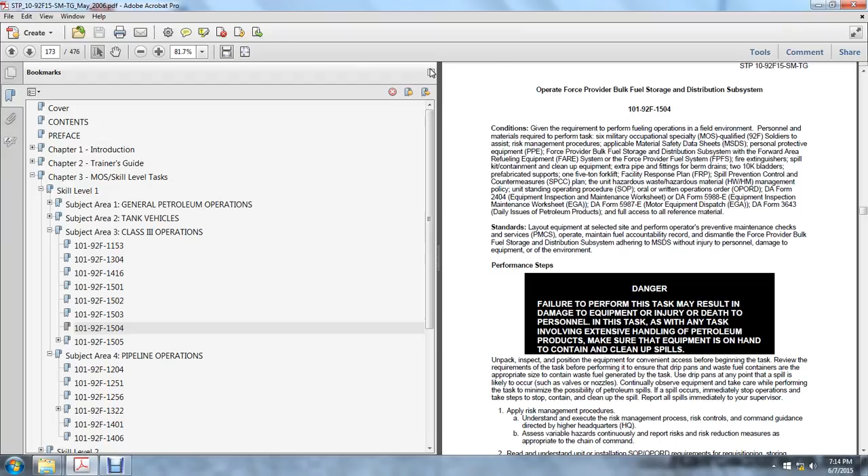Okay guys, I have two sections left, and this should be about a 20-minute read. We're on subject 3, the last part. We're going to finish the last part of the Class 3 operations, starting with 1504, 101-92-F-1504, and then 1505, and then we'll be done for the book.

Operating Force Provider bulk fuel storage distribution system, given the required personnel and materials to perform the fuel operations task. Six military occupational specialists qualified as soldiers, risk management procedures, applicable materials safety data sheets, personal protective equipment. Force Provider bulk fuel storage distribution system, forward area refueling system, Force Provider fuel system fire extinguisher, spill containment cleanup, extra pipe fittings, drains, berm drains, two 10K bladders, prefabricated supports, one five-ton forklift.

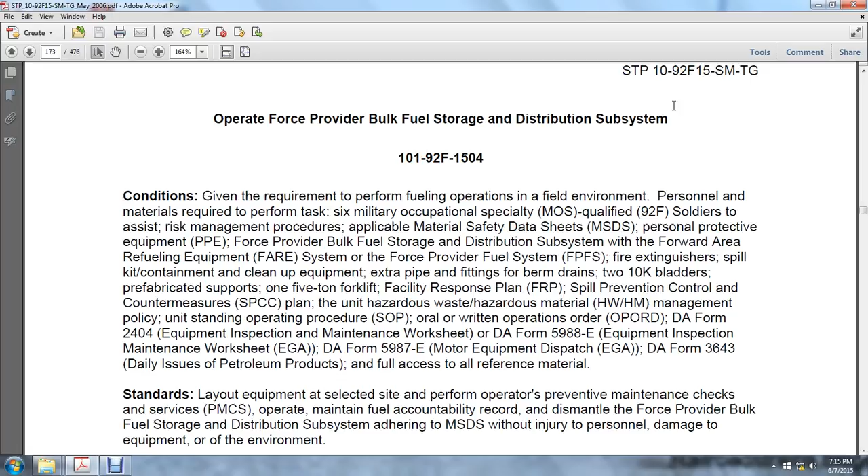A facility response to spill prevention control countermeasure plan, the unit hazardous material management policy, unit standing operating procedure, oral or written operation order, DA Form 2404 equipment inspection worksheet, DA Form 5988E inspection and maintenance worksheet, DA Form 5987E motor equipment dispatch, DA Form 3643 daily issuing of petroleum products, plus access to all reference material.

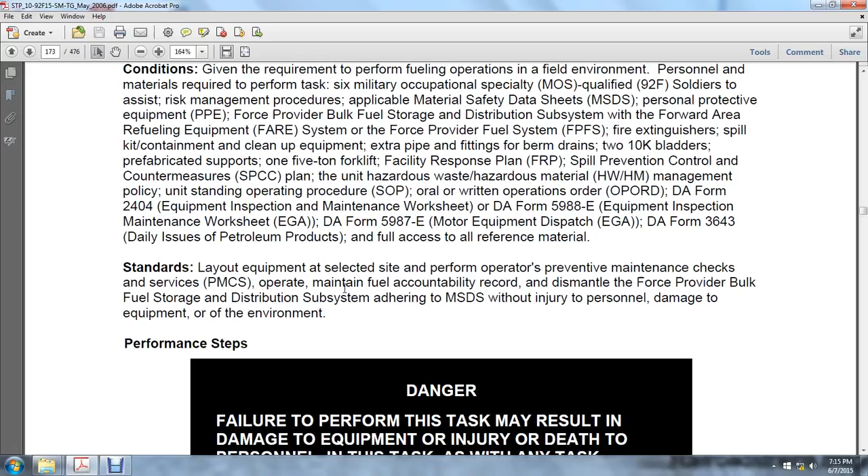Layout and equipment are selected by the site of the performer, operator preventive maintenance check services, operator maintains fuels accountability record, to dismantle the force provider bulk fuel storage distribution system, adhering to material safety data sheets without injury to personnel, damage to equipment, or the environment. Failure to perform this task may result in damage to equipment, injury, or death of personnel.

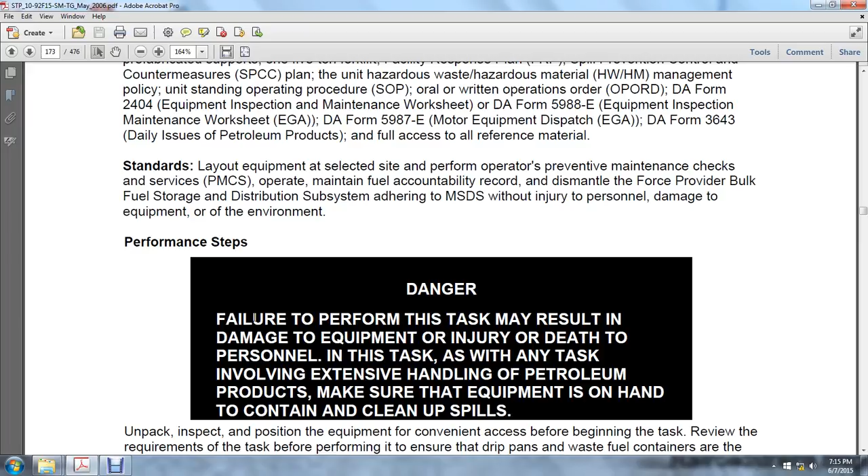As with any task involving extensive handling of petroleum products, make sure equipment is on hand and contained to clean up spills. Unpack and position equipment for convenient access before beginning the task. Review the requirements of the task to ensure drip pans and waste fuel containers are the appropriate size to contain the waste fuels generated by the task.

Use drip pans at any points where a spill is likely to occur, such as a nozzle or a valve. Continually observe the equipment, taking care while performing to minimize the possibility of petroleum spills. If spills occur, immediately stop the operation, take steps to contain it, and clean up the spill. Report all spills immediately to the supervisor.

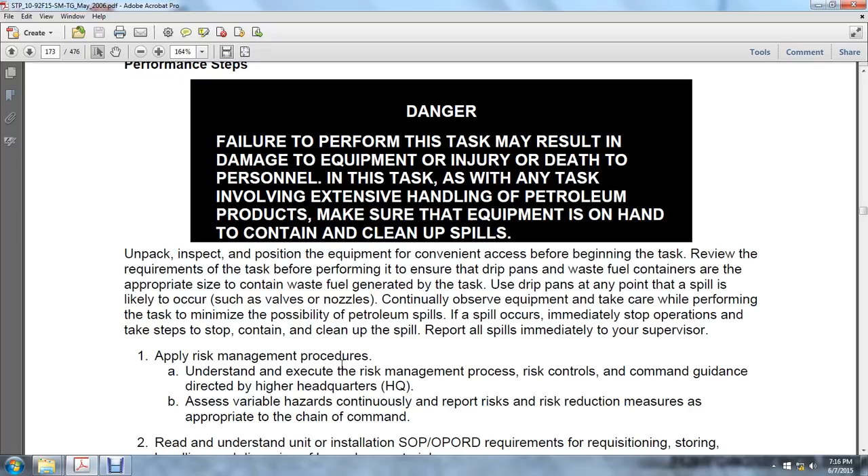Apply risk management procedures. Understand and execute risk management procedures, and risk control command guidance directed by higher headquarters. Continue to assess and report risk reduction measures as appropriate through the chain of command. Read, understand, and use unit or installation standing operating procedure/operations order requirements for requisitioning, storing, handling, and disposing of hazardous materials.

Where appropriate, personal protective equipment is required. Gloves, goggles, and hearing protection need to be worn when performing any fuel operation.

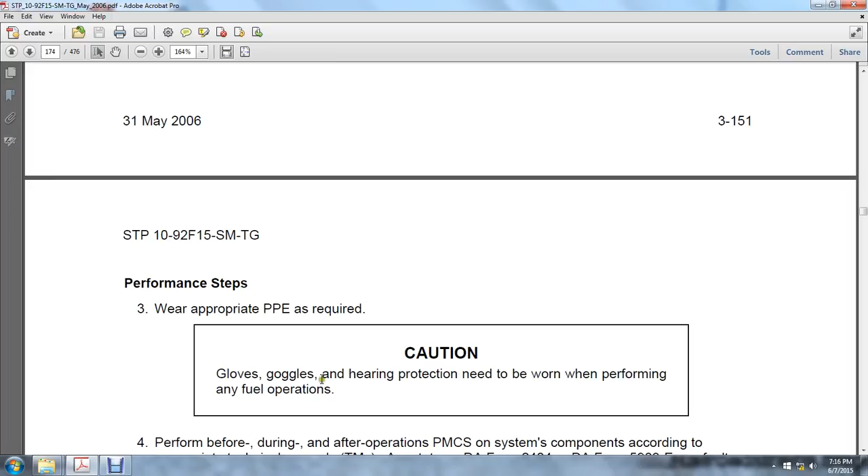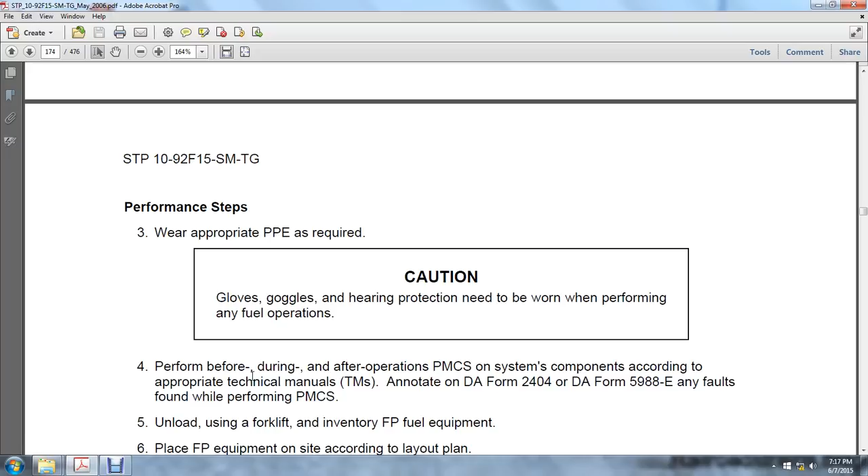Before, during, and after operations, perform preventive maintenance check services on components according to the appropriate technical manuals, DA Form 2404 and DA Form 5988E. Record any faults found during the preventive maintenance check services.

Unload and use the forklift to inventory the bulk fuel equipment. The bulk fuel equipment is laid out according to the layout plan. Inspect and clear the inside of the berms of debris and sharp objects before installing the berm liner and collapsible tank.

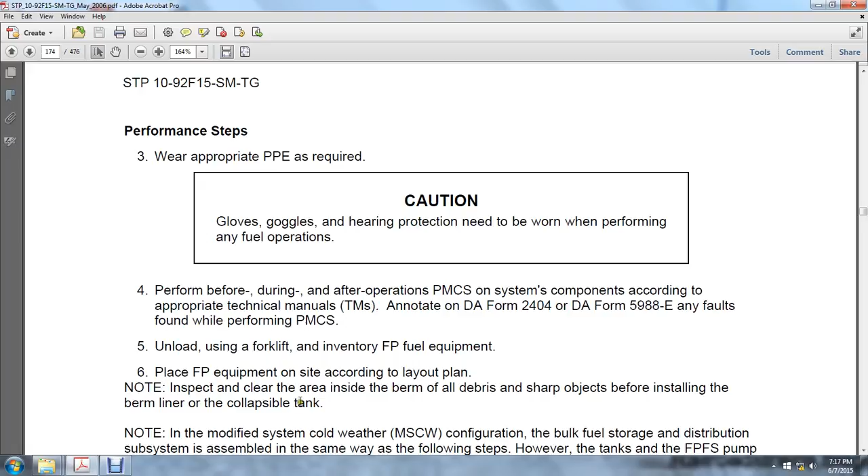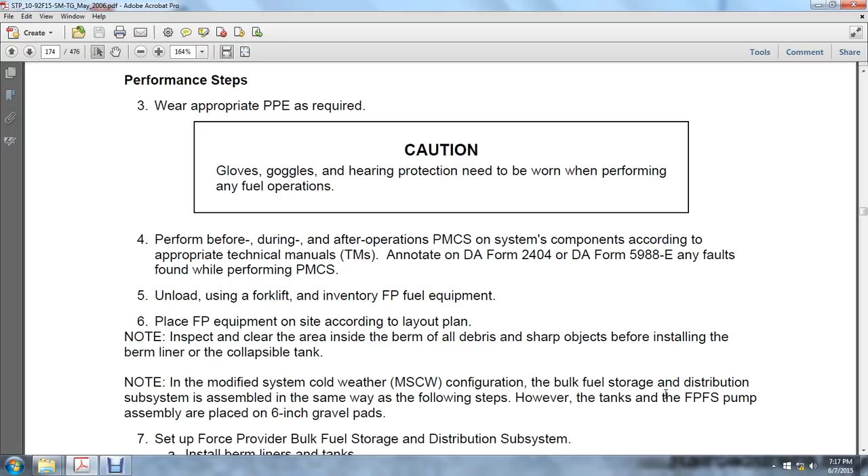In the modified system cold weather, the MSCW configuration, the bulk storage distribution subsystem is assembled in the same way following the same steps. However, the tanks of the FPFS assembly are placed on 6 inches of gravel.

Set up the Force Provider bulk fuel storage distribution system. Install berm liners and tanks, positioning the berm liners inside the berms. Secure the sandbags and position the 10,000-gallon tanks in the berms. Ensure the drain valve is located at the receiving side.

Fold the liner of the berm, then fold the liner back into the bag. Fold the liner in the bag back to dig a 2 by 2 foot by 8-inch hole to house the drain elbow. Flip the berm liner down and place three sandbags to support the elbow.

Perform this step on bag number 1: attach the drain hose to the berm liner, and secure the edges of the berm liner with sandbags. Repeat the same steps for bag number 2.

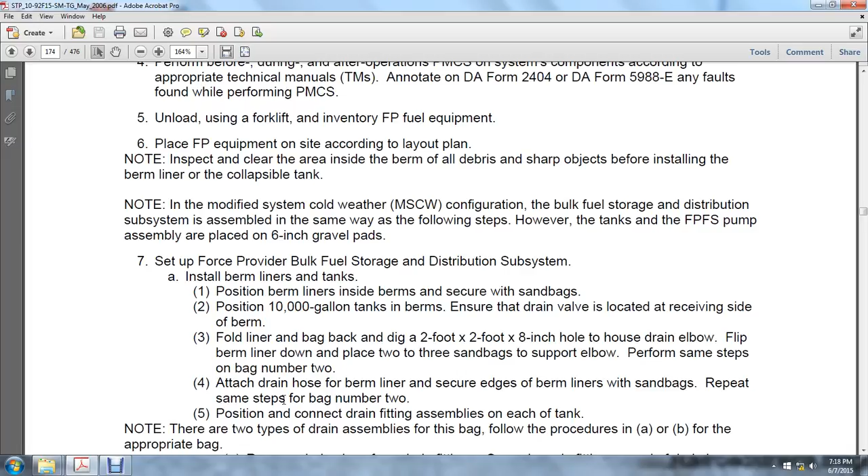Position, connect, and drain the assembly of each tank. There are two types of drain assemblies for the bag. Follow procedures A or B for the appropriate bag, and remove the drain plug for the drain fitting.

Screw in the male fittings on the end of the drain hose at the drain fitting and attach the drain control valve to the other end of the drain hose. Remove the drain cap for the drain fitting.

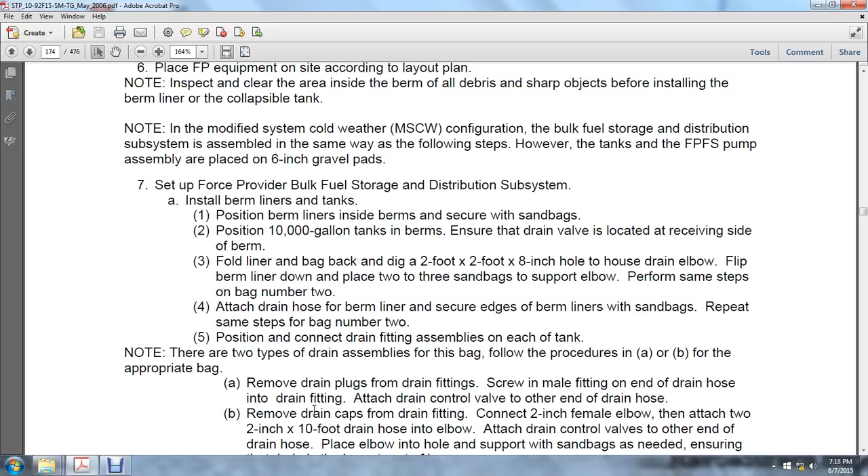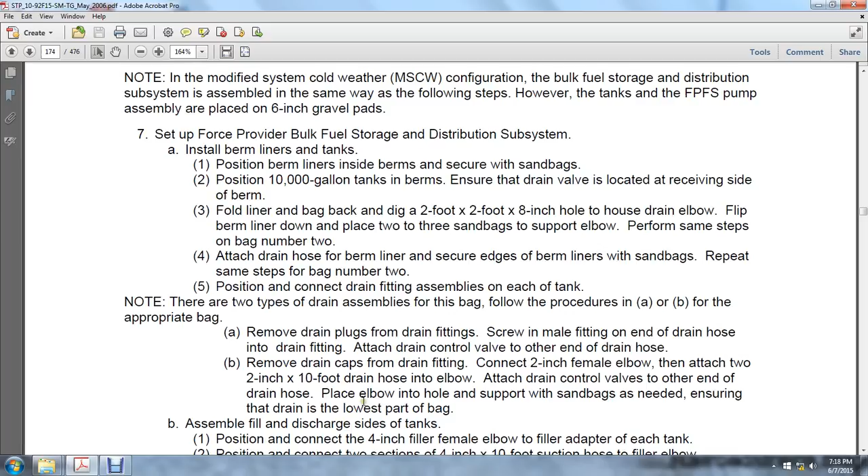Connect the 2-inch female elbow attached to the 2-inch 10-foot drain hose and an elbow. Attach the drain control valve on the other end of the drain hose. Place the elbow in a hole. Support the sandbags as needed to ensure the draining fitting is at the lowest part of the bag.

Assemble the fill and discharge sides of the tank position, connected by the 4-inch filler, the elbow, the filler adapter to each tank position. Connect the 2-section 4-inch 10-foot suction hose at the filler elbow, install the 4-inch gate valve at the end of each filler hose, install the 4-inch hose female-male discharge elbow onto the discharge adapter of the tank. Ensure the T connection and all the valves of the hose connections are kept from dirt, and install them so they are laid off on clean rock and board to be kept out of the dirt and mud.

Position the connection of the 2-section 4-inch 10-foot long suction hose to the discharge elbow. Then connect the 4-inch gate valve to the end of the hose. Install the 4-inch female, 2-inch male adapter to the gate valve on the discharge side of the tank.

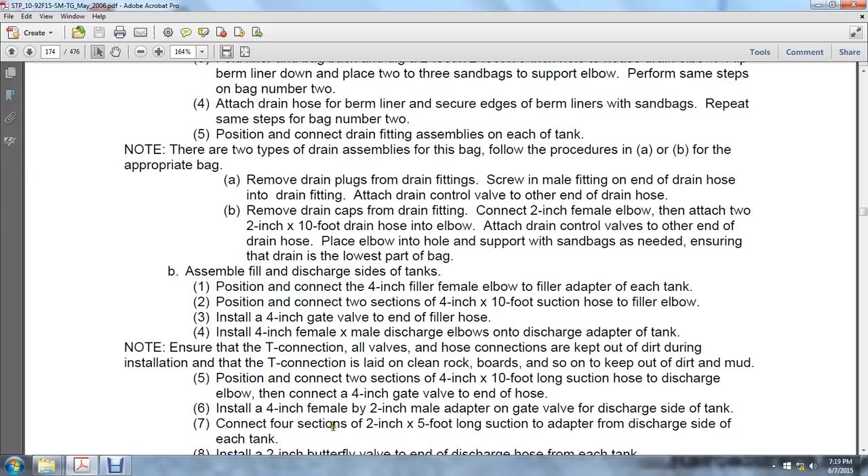Connect the 4-section 2-inch 5-foot long suction hose from the adapter to the discharge hose of each tank. Install the 2-inch butterfly valve to each discharge hose from each tank. Connect the butterfly valve with the T connecting fitting. Ensure the T connection is raised off the ground.

Assemble the FARE system: position and connect one of the 2-inch 5-foot long suction hoses to the end of the T fitting, positioned on level ground at the end of the suction hose with the inlet port of the pump facing toward the fuel tanks. Connect the hose to the pump inlet connection. Ensure that the inlet of the pump is forward facing the T fitting joint of the 2 tanks.

Position and connect the 2 5-foot sections of suction hose to the discharge end of the pump discharge. Position the filter separator on level ground at the end of the suction hose leading to the discharge port of the pump filter. The separator inlet port should be facing the pump. Drive 1 ground rod nozzle hanger at least 3 feet into the ground, halfway between the pump and the filter separator.

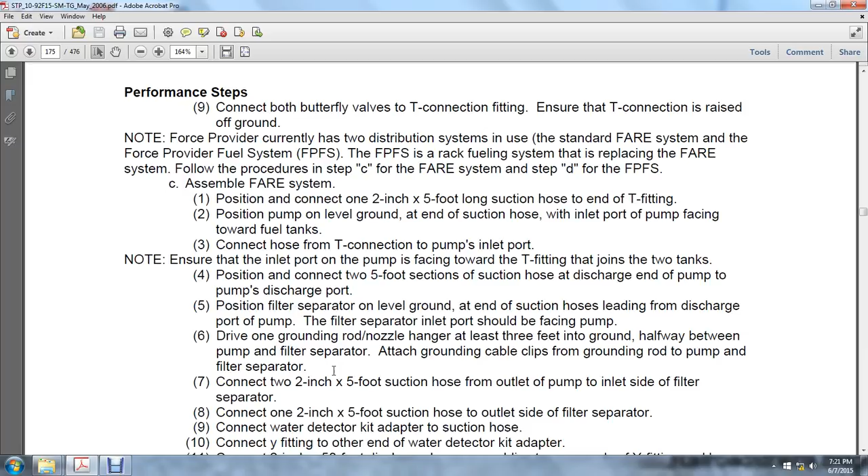Attach the ground clips to the grounding rod, to the pump, and to the filter separator. Connect the 2-inch 5-foot suction hoses from the outlet of the pump to the inlet of the filter. Connect the 2-inch 5-foot suction hose to the outlet of the filter separator.

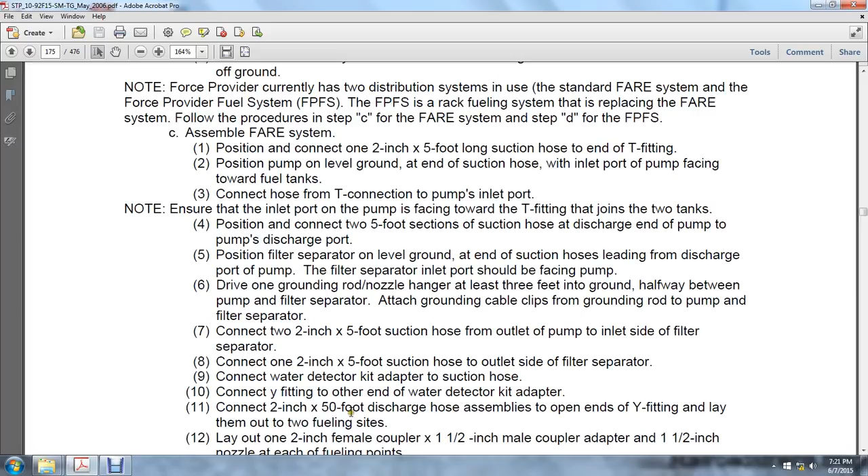Connect the water detector kit adapter suction hose. Connect the Y fitting to the other end of the water detector kit adapter. Connect the 2-inch 50-foot discharge assemblies to the opening Y fitting. Lay them out to the 2 fueling sites.

Lay out the 2-inch female coupler, 1.5-inch male coupler adapter, and 1.5-inch nozzle at each of the fuel points. Connect the 2-inch female coupler to the 1.5-inch male coupler adapter and 1.5-inch nozzle at each fuel point. Make a minimum spacing of 25 feet between fueling points.

Walk about 10 feet from the Y fitting. Drive a ground rod nozzle hanger at least 3 feet into the ground. Hang the nozzle on the hanger and repeat at the other point.

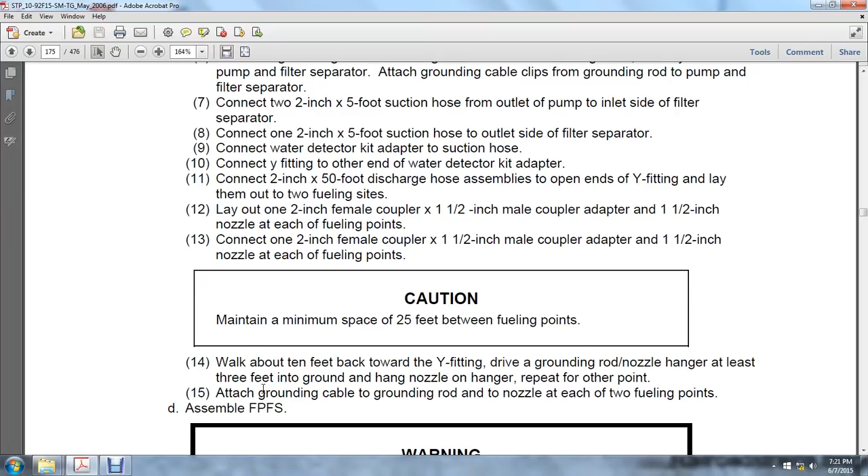Attach the ground cable, the ground rod, and the nozzle to each of the 2 fueling points. This completes the assembly of the force provider fuel system.

Warning: four personnel are required to lift the pumping assembly. Failure to observe this warning may result in injury.

Position the pump assembly as indicated by staking. There should be no more than 20 feet from the fuel source. Install the 2-inch elbow onto the 4-inch to 2-inch reducer.

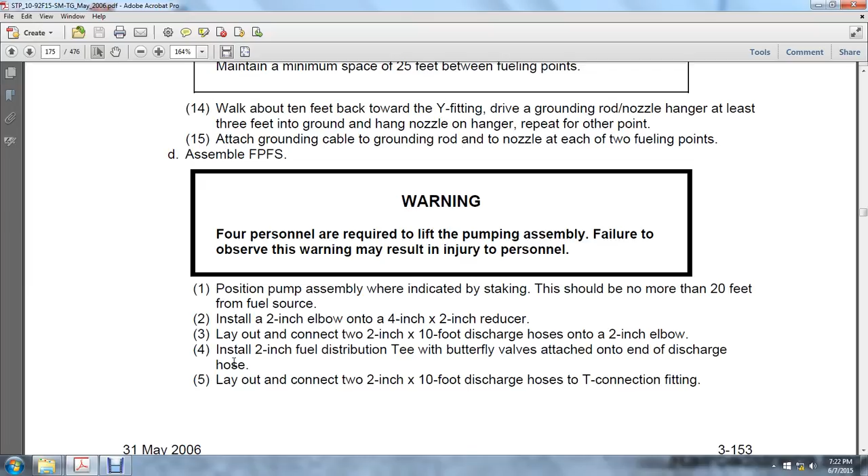Lay out and connect two 2-inch, 10-foot discharge hoses on the 2-inch elbows. Install the 2-inch fuel distribution Tee with butterfly valves, attaching it to the end of the discharge hose. Lay out and connect the 2-inch, 10-foot discharge hose to the T-connection fitting.

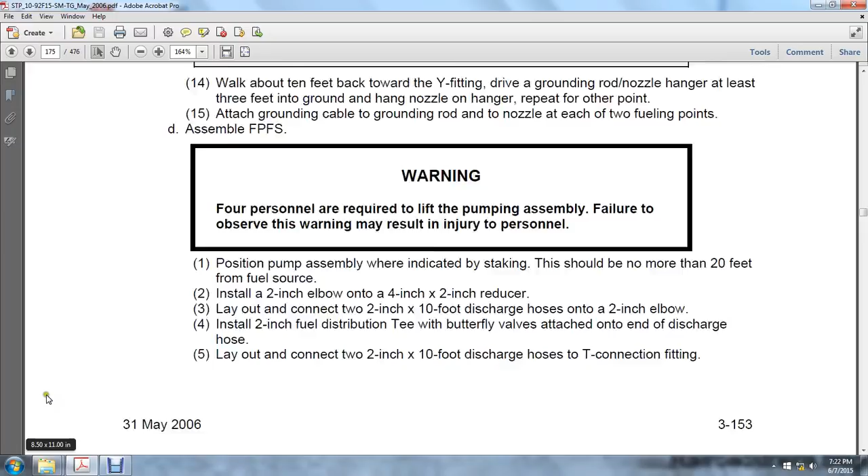Connect the other end of the hose to the force provider fuel pump inlet port.

Extreme care must be taken to prevent injury to the hands when driving the ground rods. Do not position hands between the ram and the driver collar. Gloves should be worn to avoid possible spark between the items and ground rod.

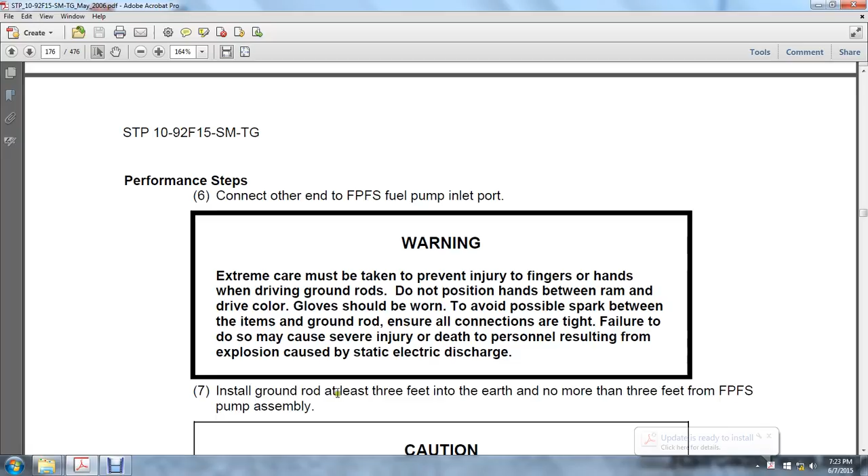Ensure all connections are tight. Failure to do so may result in injury or death from an explosion caused by static electric discharge. Install ground rods at least 3 feet into the earth, no more than 3 feet from the force provider fuel system. Pump assembly caution: maintain a minimum space of 25 feet between fueling points.

Drive the ground rod nozzle stands approximately 40 feet away from the force provider fuel system. Unwind the fuel hose from the reel. Install the fuel nozzle and place it on the stand. Reel out the ground cable and clamp cables to the nozzle stand until needed.

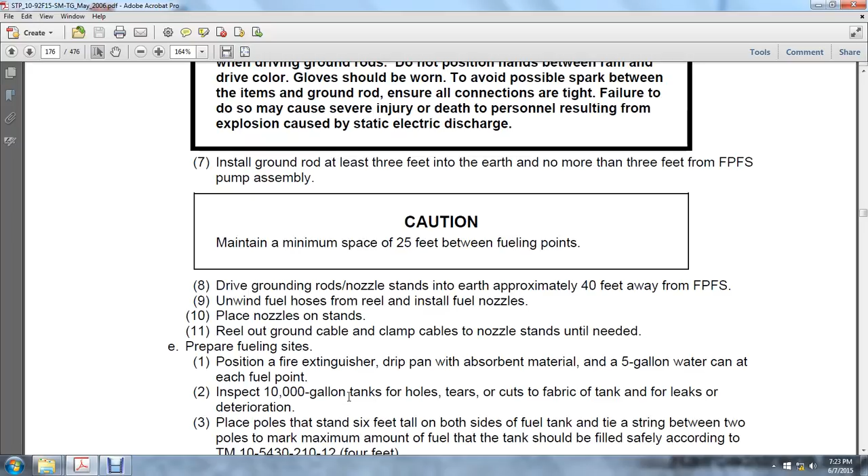Prepare the fueling site: position fire extinguishers, drip pan, absorbent material, and a 5-gallon water can at each fuel point. Place poles 6 feet on both sides of the fuel tank with string between them. The maximum amount the fuel tank should be filled is according to TM 10-5430-210-12.

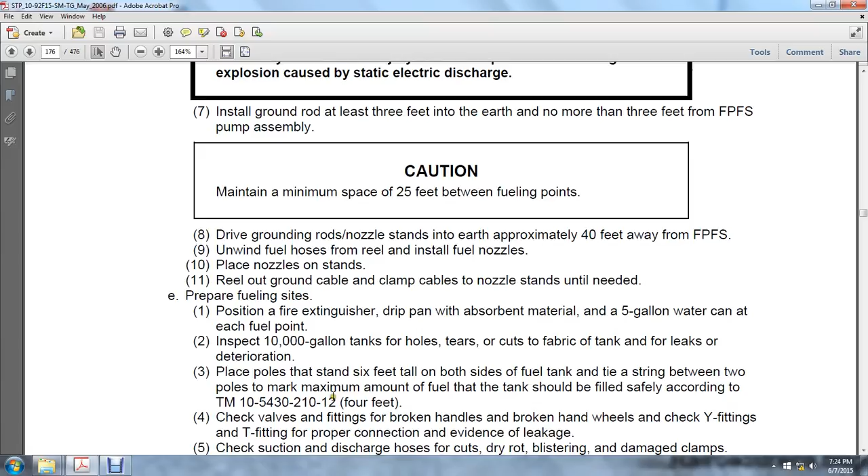Check the valve fittings for broken handles or broken hand wheels. Check Y fittings and T fittings for proper connection and evidence of leakage. Check the suction hose and discharge hose for cuts, dry rot, blistering, or damage.

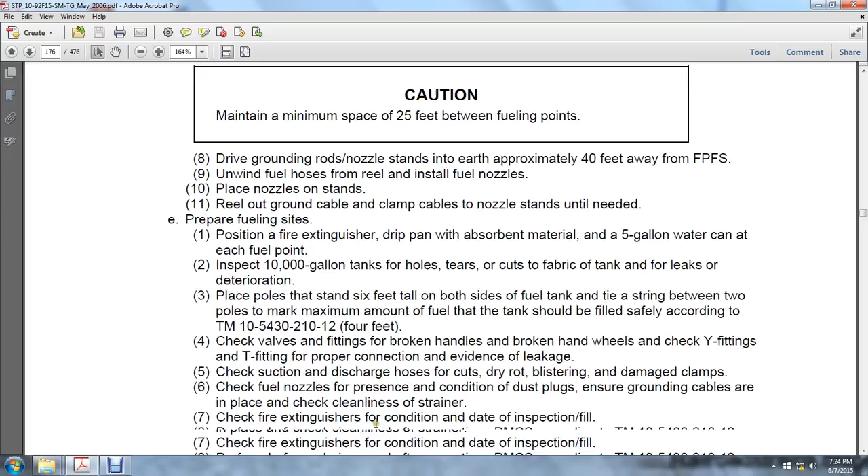Check clamps on the fuel hose and the presence and condition of the dust plug. Ensure ground cables are placed and clean. Check cleanliness of the strainer. Check the fire extinguisher condition. Date the inspection before, during, and after operation.

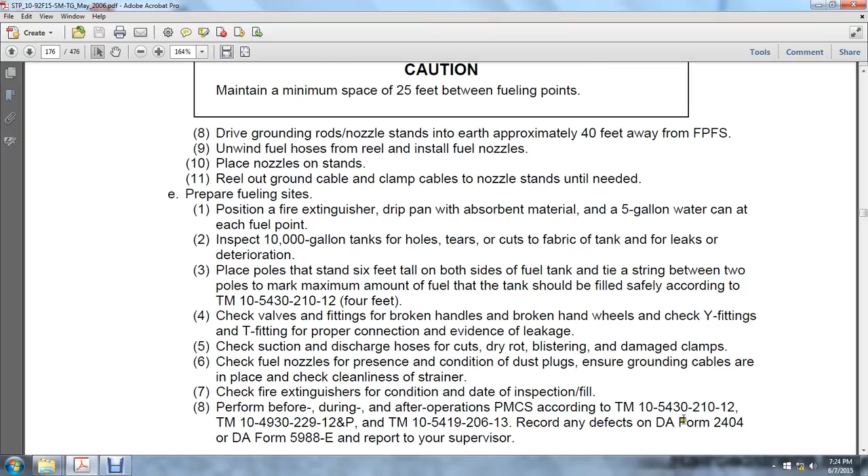Perform preventive maintenance checks and services per TM 10-5430-210-12, TM 10-4930-229-12&P, and TM 10-5419-206-13. Record any defects on DA Form 2404 and DA Form 5988E.

Report defects to the supervisor. Receive bulk fuel. Check the valves for broken handles or broken wheels. Check all fittings for proper connection and evidence of leakage.

Check the suction and discharge hoses for cuts, dry rot, blistering, or damaged clamps. Check the fuel nozzle for presence and condition of dust plugs. Ensure ground cables are in place and check cleanliness of the strainer.

Guide the bulk fuel supply vehicle to the fill side of the 10,000-gallon tank. Connect the suction hose on the fill side to the discharge hose on the truck; request the delivery driver open the discharge valve once the connection is secure.

Open the fill gate valve on the fill side of the storage tank and allow fuel to flow from the truck to the storage tank. Close the fill side gate valve before the fuel level touches the string at the top of the tank.

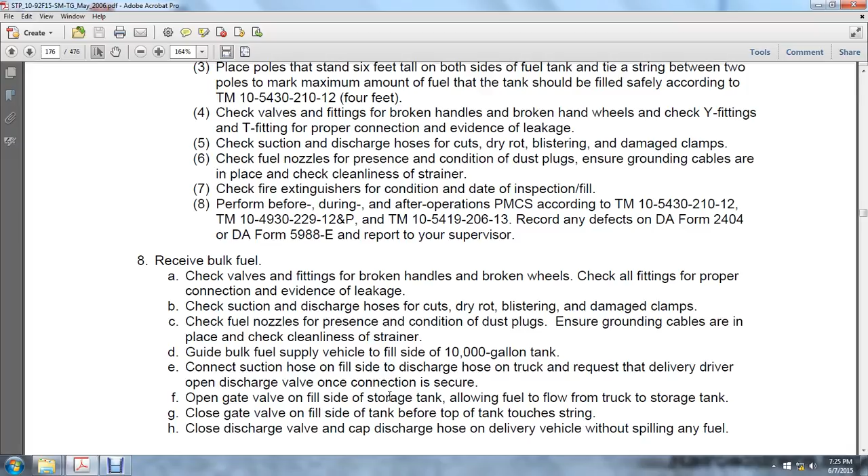Close the discharge valve and cap the discharge on the delivery vehicle without spilling any fuel. Cap the fill hose, then reopen the fill side gate valve to allow any remaining fuel in the hose to flow into the tank.

Walk the hose toward the gate valve side to force any remaining fuel into the storage tank. Repeat these steps for the other 10,000-gallon tank.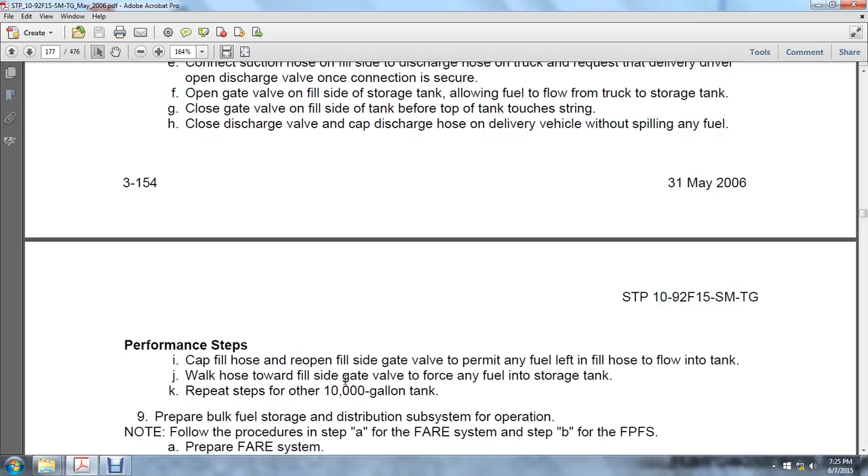Prepare the bulk fuel storage and distribution subsystem operation following the procedures in Step A for the forward area refueling systems and Step B for the force provider fuel system.

Prepare the system: ensure the pump is primed. If not, remove the priming plug of the pump, fill with fuel, and replace the priming plug only when required. Open the filter separator air vent of the pump, pushing it down to lock in place, and close the water drain valve by turning the handle to the right of the filter separator.

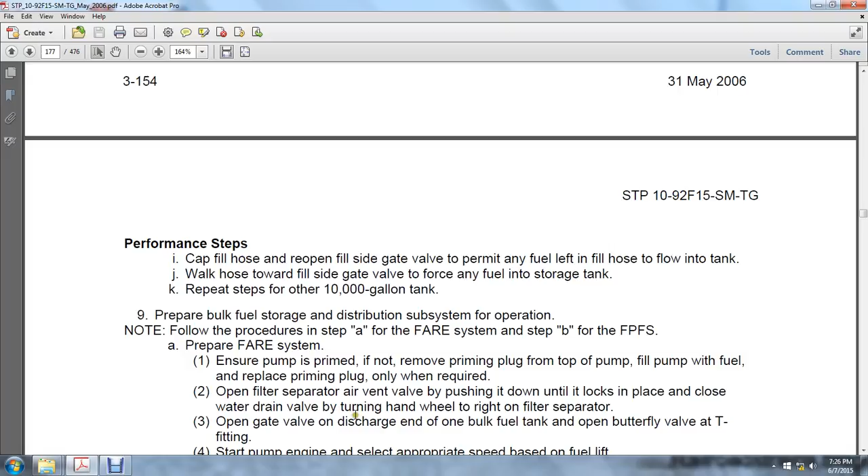Open the discharge gate valve of the bulk fuel tank. Open the butterfly valve of the T-fitting, start the pump engine, engage the pump, and select the appropriate speed based on the fuel lift.

Run the pump engine at idle speed for a lift of 2 feet or less, and run the engine above idle speed but less than full throttle for a lift of 2 to 5 feet. Run the pump at full throttle for a lift of 5 feet or more.

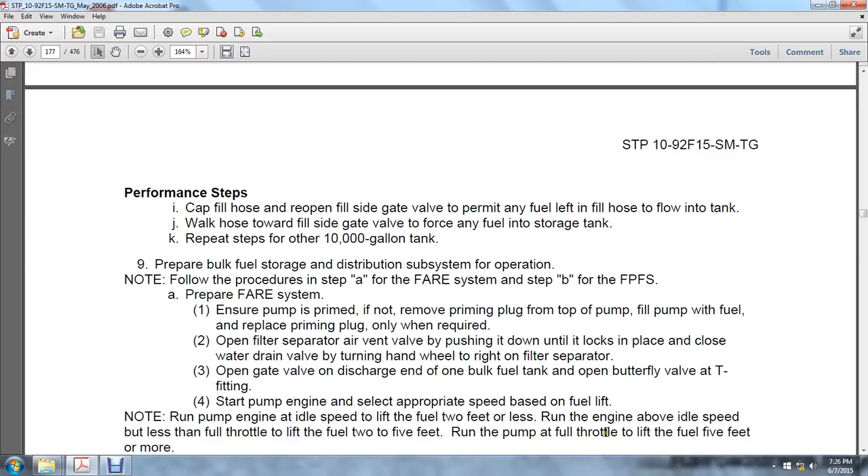Reduce engine speed upon hearing the engine sound. Slow down. Once the engine has reached full prime, slowly close the air vent of the filter separator the first time the fuel appears, then check the pressure gauge. Check the pressure gauge for the following: green, 0 to 20 psi, clean; yellow, 20 to 35 psi, change at the end of operation; red, 35 psi and above, change at once.

Take samples from each of the nozzles for testing as soon as the system is full of fuel. Prepare the force provider fuel system. Connect the force provider fuel system assembly power cord to the nearest PDISE M100. Momentarily turn on the power switch to verify proper rotation of the pump. Prime the pump through the priming ports, filling the pump with fuel.

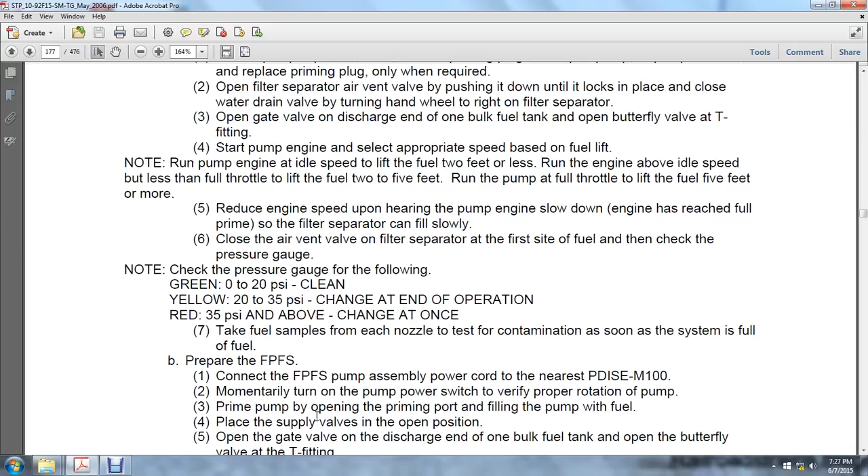Place the supply valves in the open position. Open the gate valve at the discharge end of the bulk fuel and open the butterfly valve of the T-fitting. Check all the fuel line connections for fuel leaks. Tighten the connections as necessary. Turn on the pump power switch and open the vent located on the top of each filter. Allow the air to vent fully. Fully close the vent when fuel begins to flow from the vent.

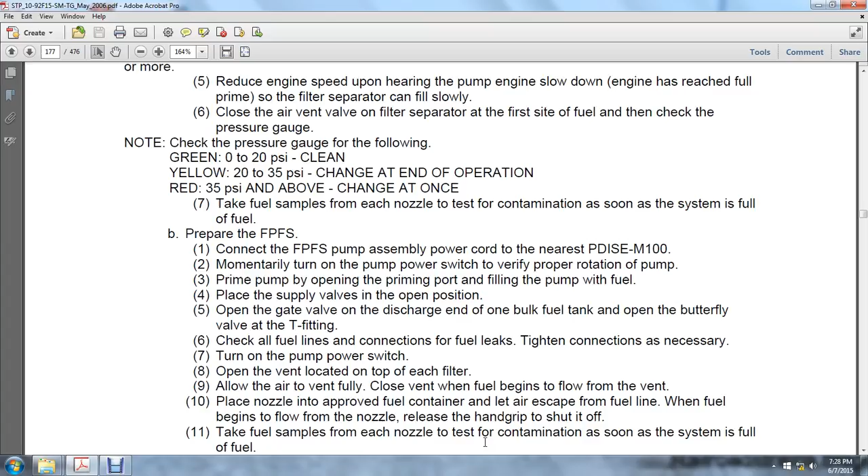Place the nozzle in an approved fuel container. Let air escape from the fuel line. When the fuel begins to flow from the nozzle, release the hand grip to shut off. Take fuel samples from each of the nozzles for testing as soon as the system is full of fuel.

10. Dispense. The procedures for dispensing are basically the same for both the FARE and the force provider fuel system. Position a spill container under the port of each vehicle. Place the fire extinguisher within reach of the fueling operation. Ground the vehicle with the ground clip from the nozzle hanger. Remove the dust cap from the nozzle and the receptacle cap from the vehicle.

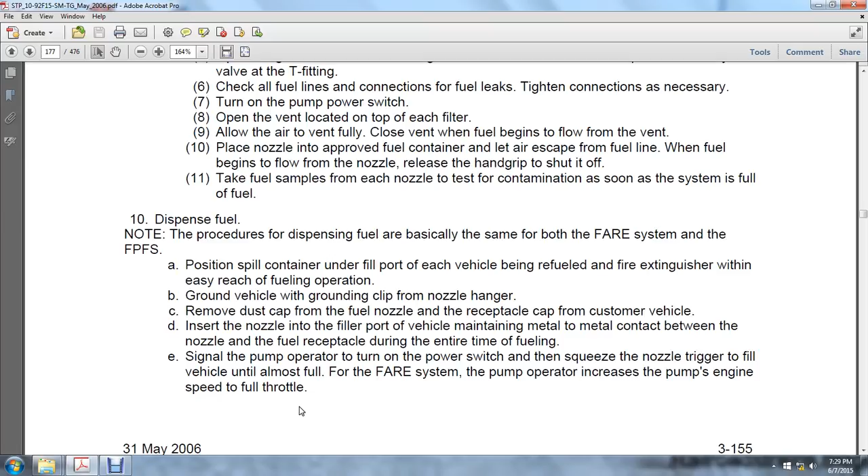Insert the nozzle into the fill port, maintaining metal contact between the nozzle and the fuel receptacle during the entire fueling. Signal the pump operator to turn on the power switch and squeeze the nozzle trigger to fill the vehicle up almost to full. For the FARE system, the pump operator engages the engine and speeds it to full throttle.

Release the trigger, signal the pump operator to turn off the power switch, and remove the nozzle. For the FARE system, the pump operator decreases the engine speed to idle before shutting off the pump engine. Then reinstall the dust cap and the fill cap of the vehicle. Replace the nozzle on the grounding rod. Move the fire extinguisher and spill container to the original position. Remove the ground clip from the vehicle and clamp it back to the nozzle stand.

Complete DA Form 3643, per Field Manual 10-67-1, Chapter 3. Clean up and dispose of any spilled fuel according to the spill contingency plan. Dismantle the force provider bulk fuel storage and distribution subsystem using the following procedures: A, the FARE system, and B, the FPFS, force provider fuel system. Dismantle the forward area refueling equipment system.

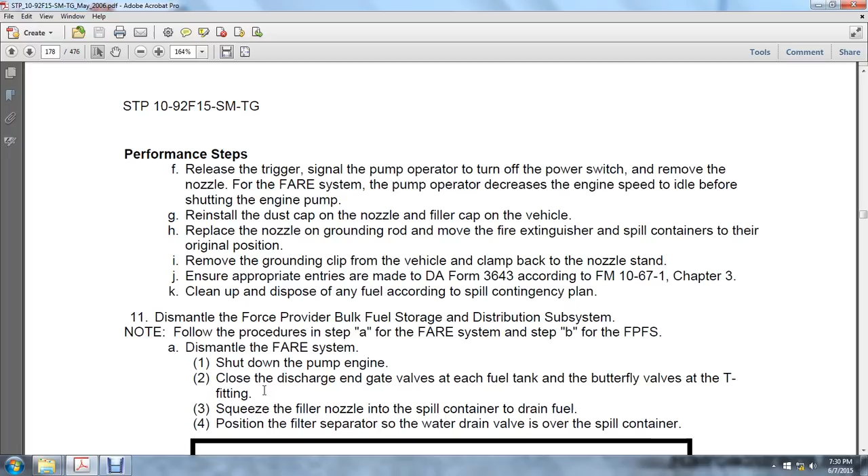Shut down the pump engine, close the discharge gates of each fuel tank and the butterfly valves of the T-fitting. Squeeze the nozzle into the spill container to drain the fuel. Position the filter separator so that the water drain valve is over the spill container. Steady the filter separator during the draining process to avoid spills, damage to equipment, or injury to personnel. Leave the grounding cables connected to the ground rods as long as possible to avoid electric shock.

Open the air vent on the filter separator and the water drain valves, turning the hand wheel to the left. Drain the separator, then close the drain valve. Position the filter separator so the outlet port is over the spill container. Disconnect the hose from the filter separator outlet and cap the hose and the outlet port. Reposition the separator so that the inlet port is over the container.

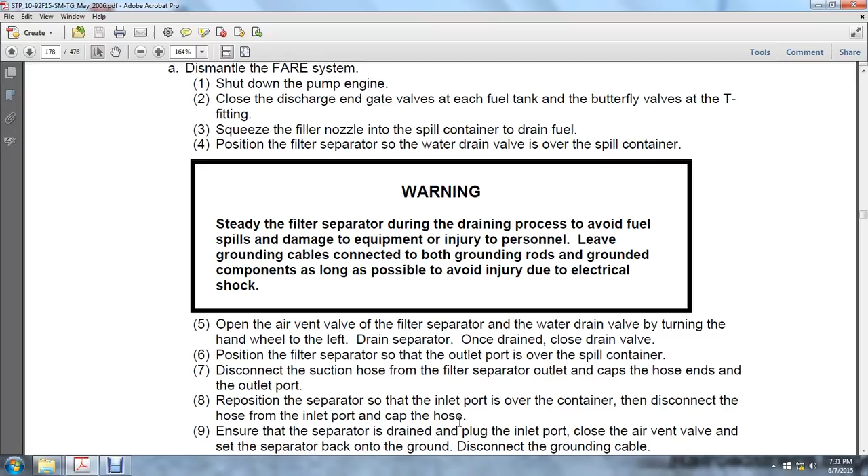This disconnects the hose from the inlet port and caps the hose. Ensure the separator is drained and plug the inlet port. Close the air vent of the valve. Set the separator back onto the ground. Disconnect the ground cable. Place the spill container under the Y fitting.

Disconnect the right discharge hose from the Y fitting and cap the fitting. Hold the opening of the discharge hose inside the spill container. Remove the ground cable of the ground rod from the filler nozzle. Remove the filler nozzles from the end of the discharge hose over the pail and spill container.

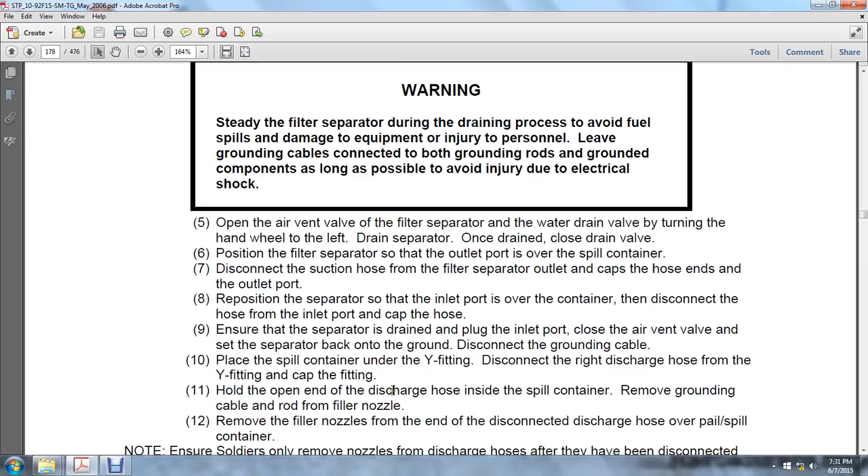Ensure soldiers only remove nozzle discharge hose after they have been disconnected. With the Y fitting disconnected, each end of the hose at the Y fitting is placed over the spill container. Stretch the hose for the full length, lift the nozzle end to shoulder high. Walk toward the Y fitting. Drain fuel in the spill container. Cap the male end of the hose.

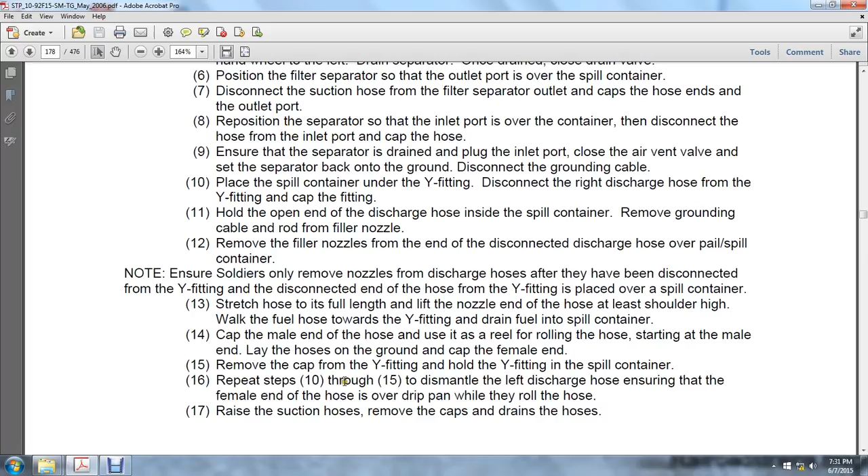Reel the hose starting at the male end, lay the hose on the ground, cap the female end. Remove the cap of the Y fitting. Hold the Y fitting over the spill container. Repeat steps 10 through 15. Dismantle the left discharge hose. The female end of the hose is over the drip pan while they roll the hose.

Raise the suction hose. Remove the caps. Drain the hoses. Perform step 18. Disconnect the Y-fitting water adapter from the suction hose, cap and plug the Y-fitting and cap the end of the suction hose. Place the spill container under the T connection and 2-inch suction hose. Disconnect the suction hose from the T fitting.

Tilt the pump up toward the fitting, draining the fuel from the pump hose. Disconnect the suction hose from the pump inlet, cap the hose and inlet port. Cap hoses between pump and the T-fitting. Place the spill container under the 2-inch suction hose at the outlet on the discharge side of the pump and remove the cap to drain the hose.

Tilt the pump towards the spill container. Drain the fuel from the pump and hose. Disconnect the suction hose from the pump outlet. Raise the suction hose to drain. Cap both ends of the hose. Remove the ground cable and the rod. Place the spill container under the fitting between the 2-inch, 4-inch reducer of each tank and disconnect the reducer

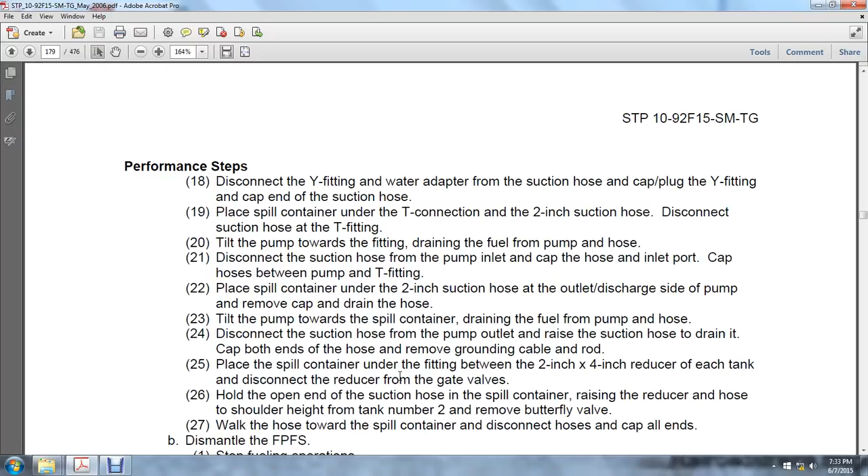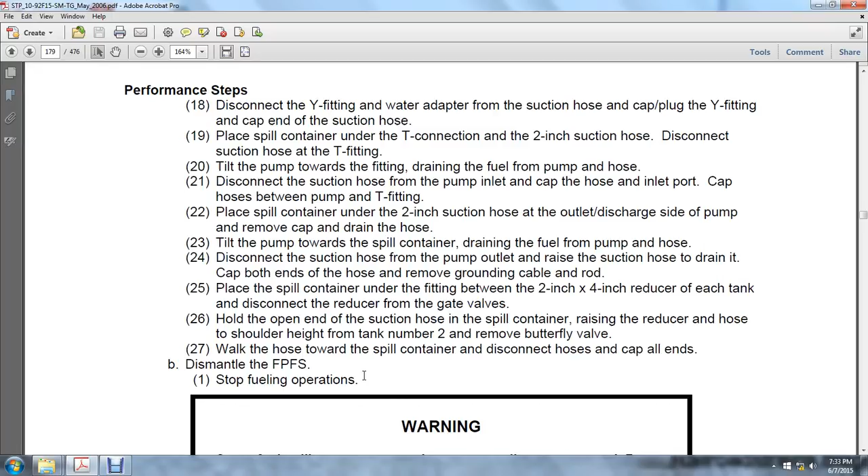Warning: some fuel spillage may occur whenever couplings are opened. Be prepared to collect residual fuel with a pail and rags. Failure to observe the warning may result in environmental and equipment contamination and a potential fire hazard. Close the discharge gates at each fuel tank and the butterfly valves at the T-fitting. Squeeze the filler nozzle in the spill container to drain.

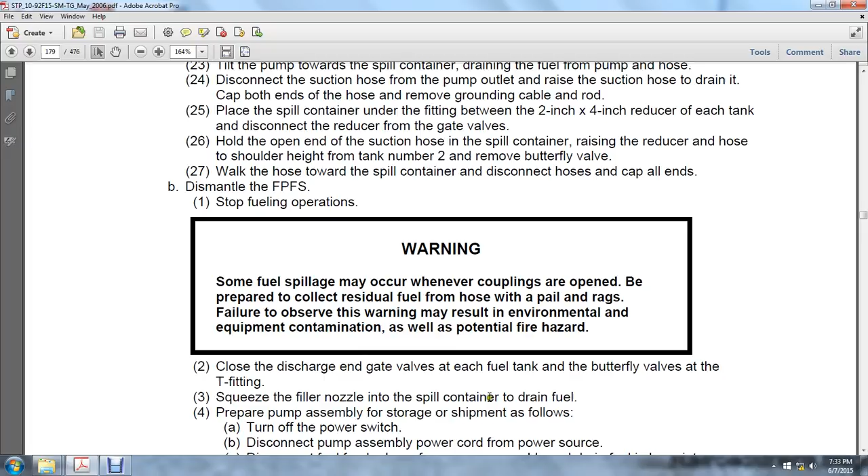Fuel. Prepare the pump assembly for storage or shipment as follows. Turn off the power switch. Disconnect the pump assembly power cord from the power source. Disconnect the fuel feeder hose from the pump assembly. Drain fuel from the hose into a proper fuel container. Open the vent on top of filters. Place a container under the drain valve at each filter.

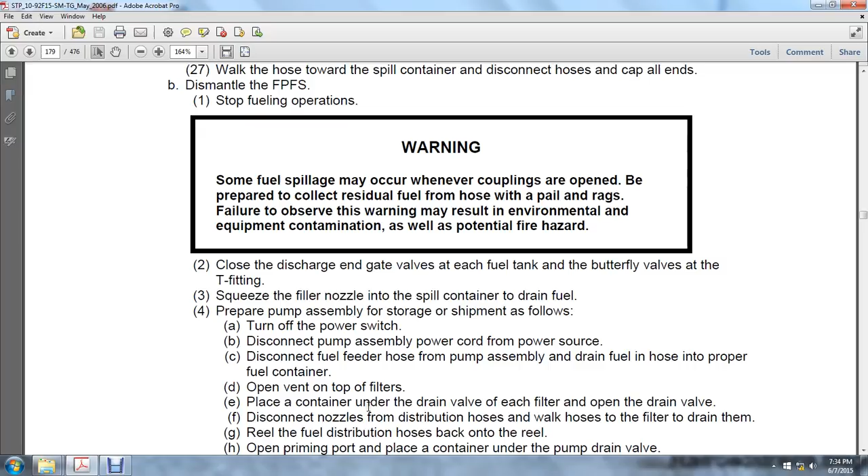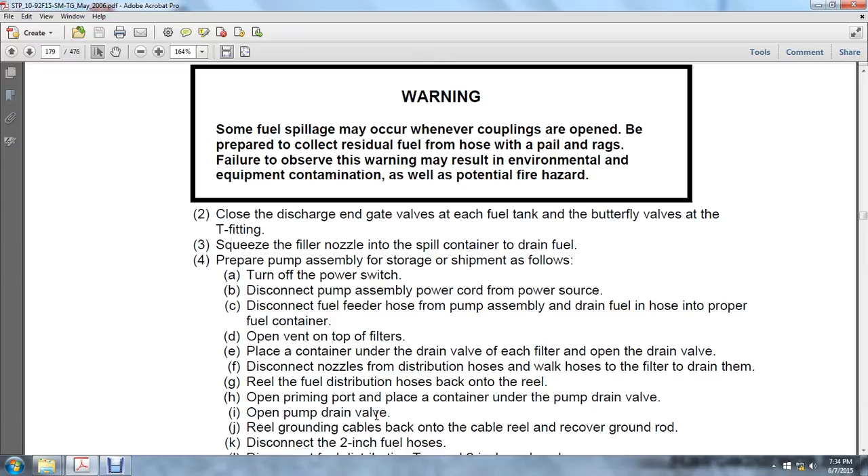Open the drain valve. Disconnect the nozzle distribution hoses. Walk off the hose to the filter to drain. Then reel the fuel distribution hose back onto the reel. Open the priming port. Place a container under the pump drain. Open the pump drain valve. Reel grounding cables back onto the cable reel.

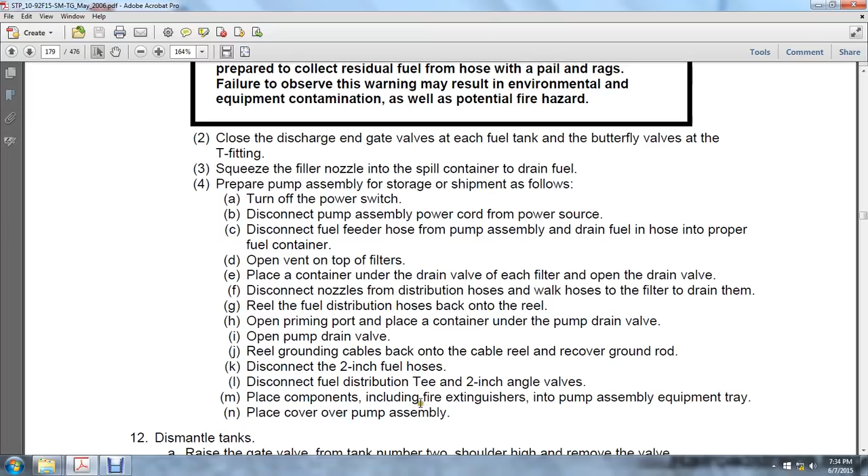Recover the ground rod. Disconnect the 2-inch fuel hose. Disconnect the fuel distribution T and 2-inch valves. Place components including fire extinguisher into the pump and equipment tray. Place the cover over the pump assembly. Dismantle the tanks. Raise the gate valve. Take tank number 2 shoulder high.

Remove the valve. Walk the hose toward the tank discharge elbow to permit any residual fuel in the 4-inch hose to drain into the tank. Disconnect the elbow from the tank and cap. Disconnect the hose and cap. Then remove the cap from the safety air vent valve.

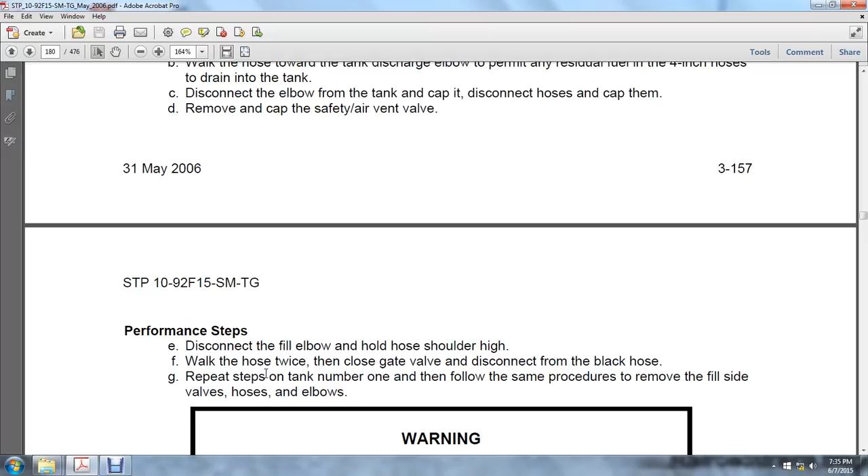Disconnect the fill elbow and hold the hose shoulder high. Walk those twice and close the gate valve. Disconnect the black hose. Repeat the steps on tank number 1. Follow these steps for the same procedures to remove the fill side of the valve hoses and elbows.

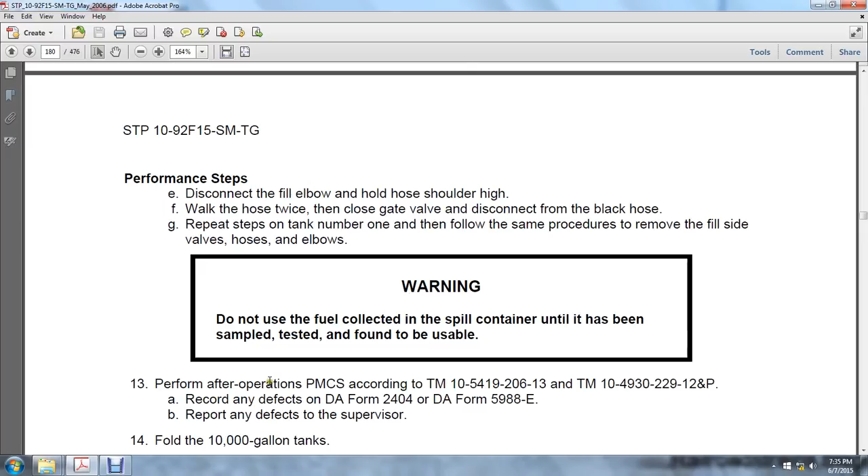Warning: do not use fuel collected in the spill container until it has been sampled, tested, and found to be usable. Perform after-operation preventive maintenance checks and services according to TM 10-5419-206-13 and TM 10-4930-229-12&P. Record any defects on DA Form 2404 or DA Form 5988-E. Report any defects to the supervisor.

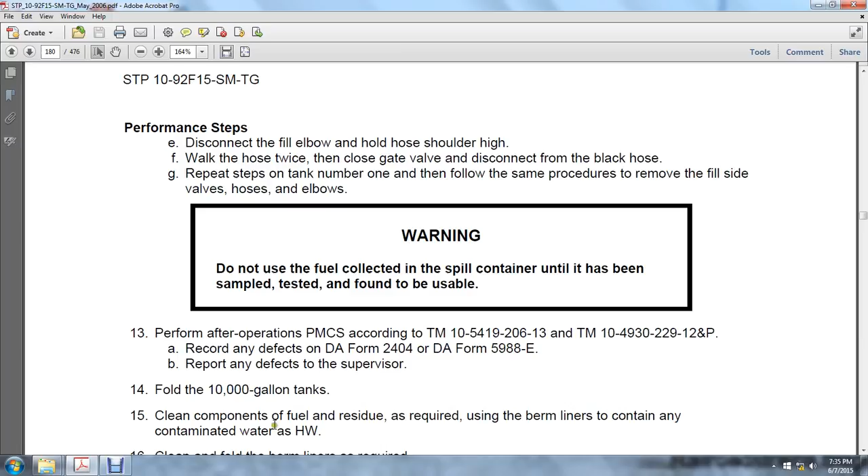Fold the 10,000 gallon tanks. Clean the components of fuel and residue as required, using the berm liners to contain any hazardous waste. Clean and fold the berm liners as required. Dispose of the contaminated fuel according to the spill contingency plan.

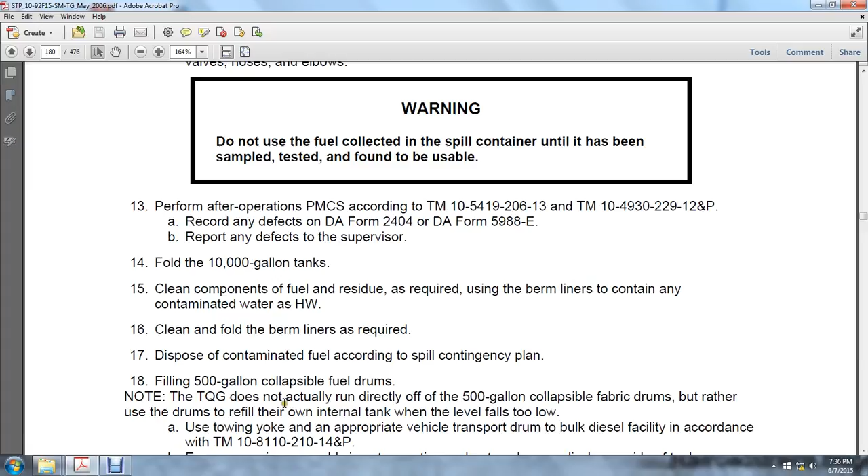Fill 500 gallon collapsible fuel drum. The TQG does not actually run directly off the 500-gallon collapsible fabric drums, but rather uses the drum to refill its own internal tank whenever the level falls low. Using the towing yoke and appropriate vehicle, transport the drum to the bulk diesel fuel facility in accordance with TM 10-8110-210-14&P. Ensure the pumping assembly is not operating and the gate valves on.

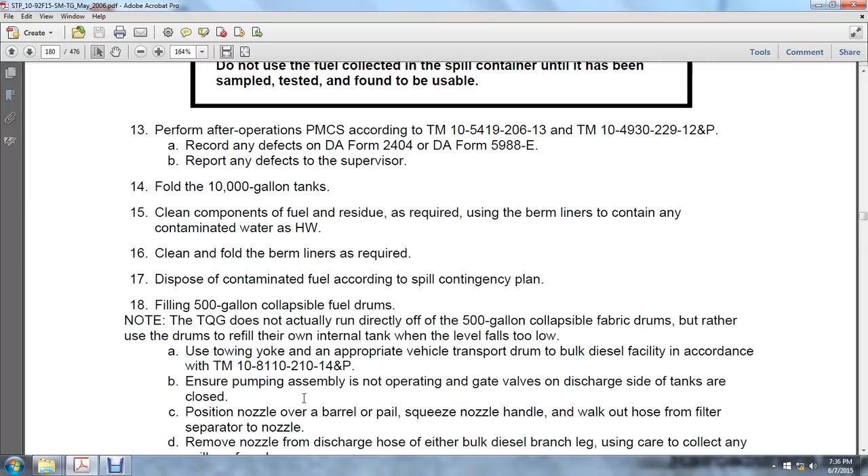The discharges on the side of the tank are closed. Position the nozzle over a barrel or pail. Squeeze the nozzle handle. Walk out the hose between the filter separator and the nozzle. Remove the nozzle from either the bulk diesel branch leg, using care to collect any spillage from the hose. Immediately install the pressure control and short hose onto the hose. Connect the short hose to the coupling on the drum.

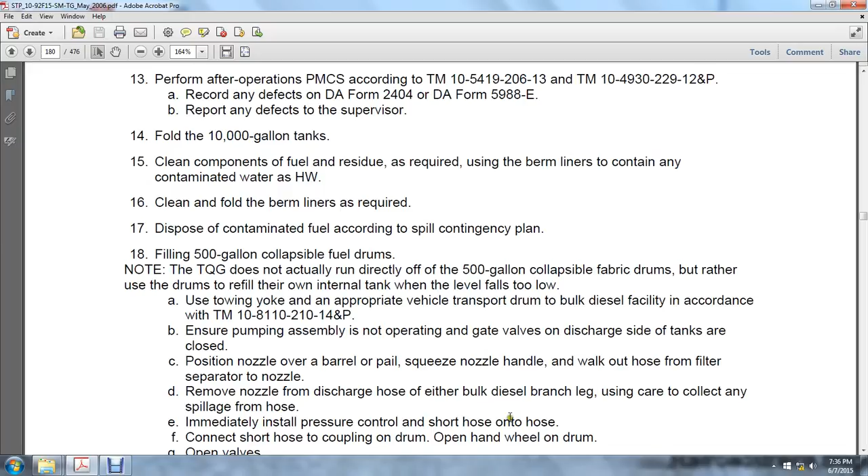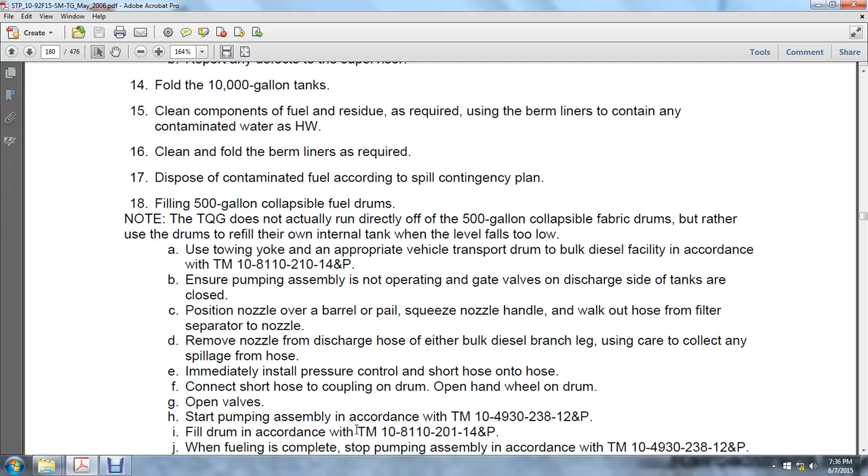Open the hand wheel on the drum. Open the valve, start the pumping assembly in accordance with TM 10-4930-238-12&P. Fill the drum in accordance with TM 10-8110-201-14&P. When fueling is complete, stop the pumping assembly according to TM 10-4930-238-12&P.

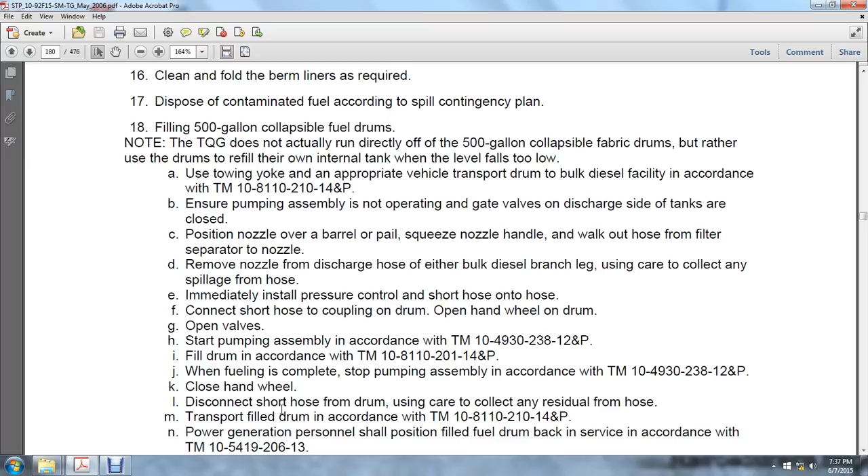Close the hand wheel. Disconnect the short hose from the drum, collecting any residual from the hose. Transport the filled drum according to TM 10-8110-210-14&P. Power generation personnel shall place the fuel drum back into service in accordance with TM 10-5419-206-13.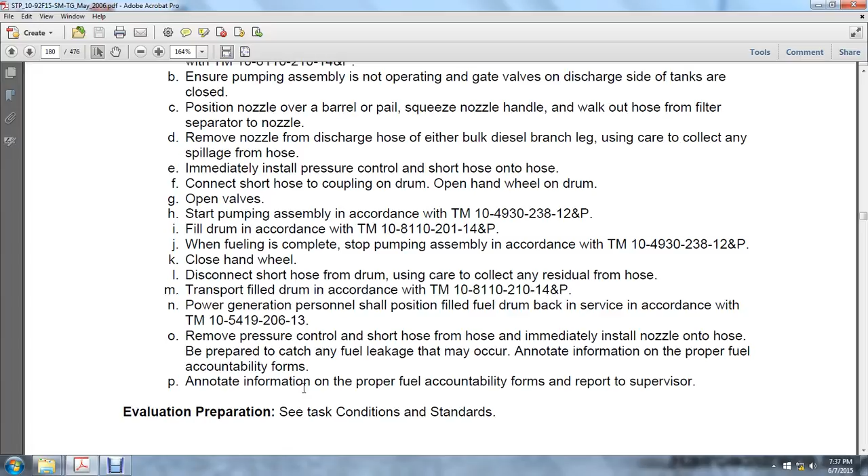Remove the pressure control short hose from the hose. Immediately install the nozzle onto the hose. Be prepared to catch any fuel leakage that may occur. Note the information on the proper fuel accountability forms. Report it to the supervisor. Evaluation and preparation. See task, conditions, and standards.

Applied risk management procedures. Read and understand unit and installation standardized requirements for requisitioning, storing, handling, and disposing of hazardous materials and appropriate personal protective equipment. Performed before, during, and after operations preventive maintenance checks and services on system components according to the appropriate technical manuals, and noted on DA Form 2404 and DA Form 5988-E any faults found while performing the preventive maintenance checks and services.

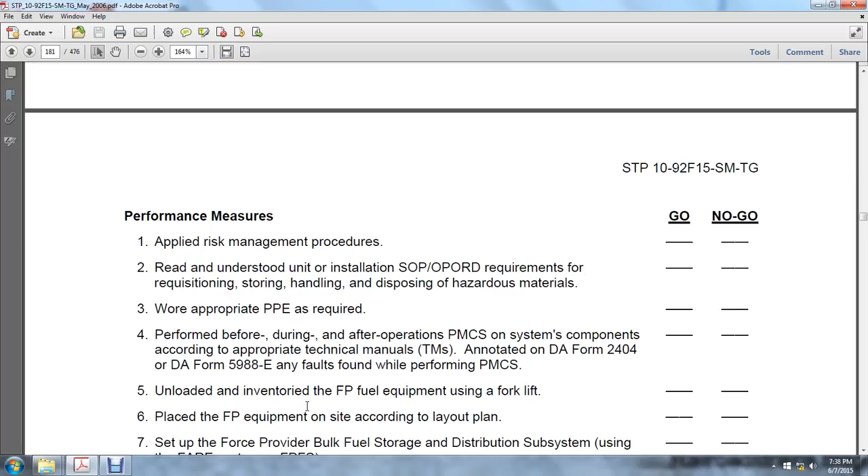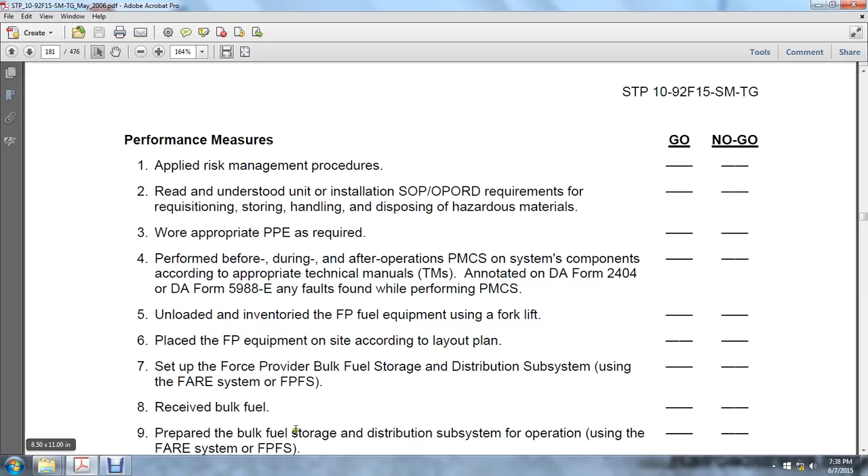Unloaded and inventoried the force provider fuel equipment using a forklift. Placed the force provider equipment on the site according to the layout plan. Set up the bulk fuel storage distribution subsystem using the FARE system and the bulk fuel storage. Received bulk fuel. Prepared the bulk fuel storage distribution subsystem for operation using the FARE system and the FPFS. Dispensed fuel using the FARE system and the FPFS.

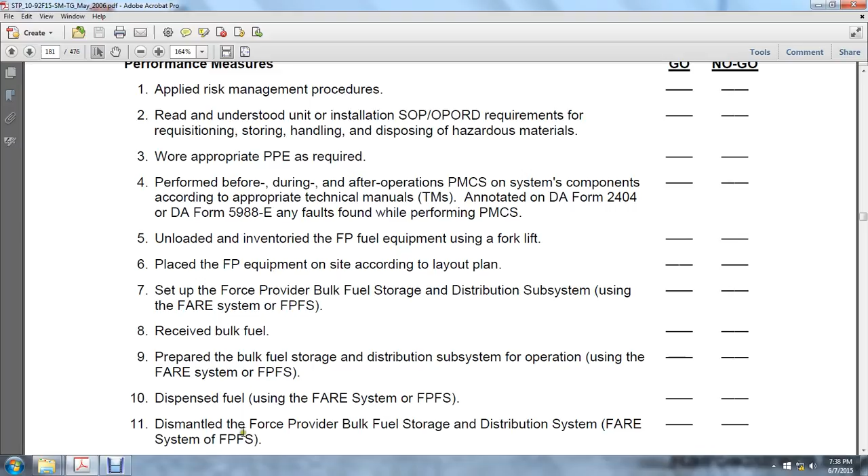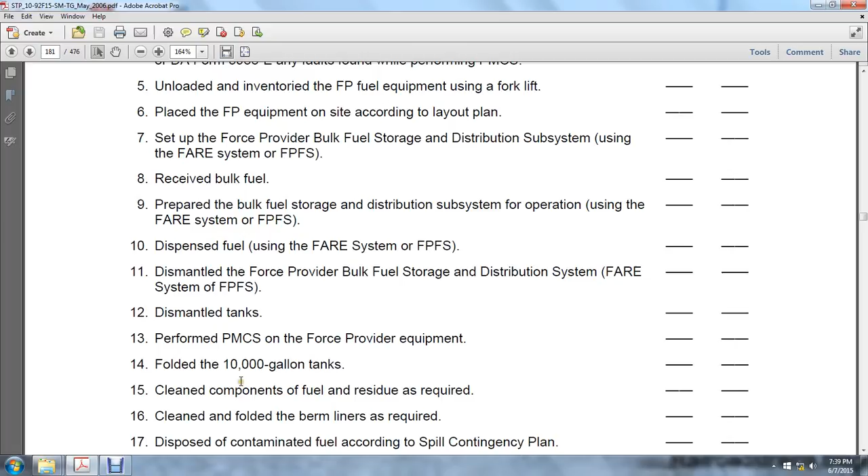Dismantled the bulk fuel storage distribution system, FARE system and forward supply fueling system. Dismantled tanks and performed the preventive maintenance checks and services on the force provider equipment. Fold the 10,000-gallon tanks. Clean the components of fuel residual as required. Clean and fold the berm liners as required. Dispose of the contaminants according to the spill contingency plan. Fill the 500-gallon fuel drum as required.

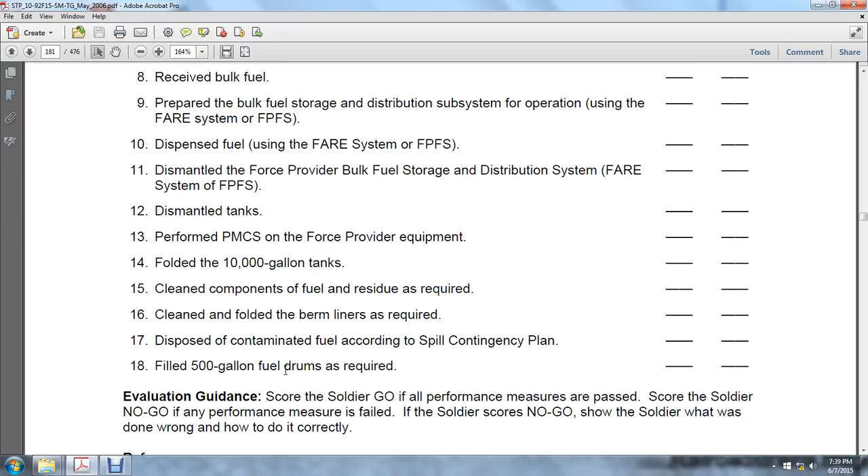Soldier is a go if passed. Soldier is a no go if failed. If it's a no go, show the soldier what was done wrong and how to do it correctly.